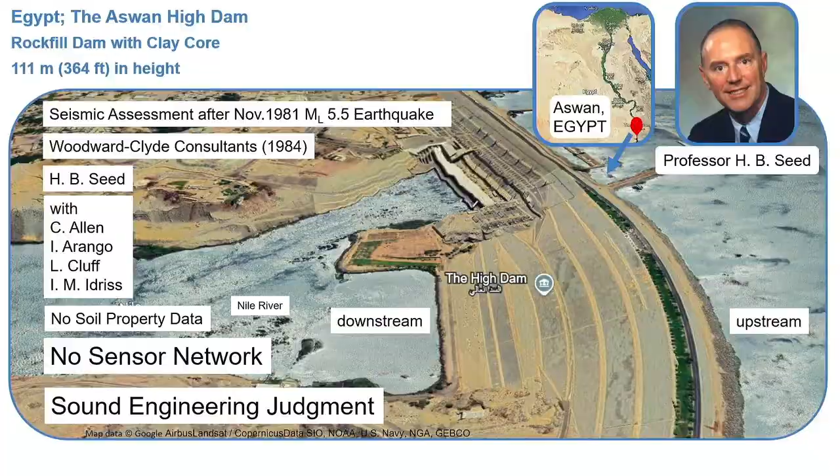A year after that, a large earthquake occurred in Mexico, as you might know, in 1985. A rockfill dam was also affected in this earthquake, but in this case, we had data from inclinometers, from surface reference points, and from strong motion instruments to measure accelerations, and also data recorded over 10 years from 6 different earthquakes.

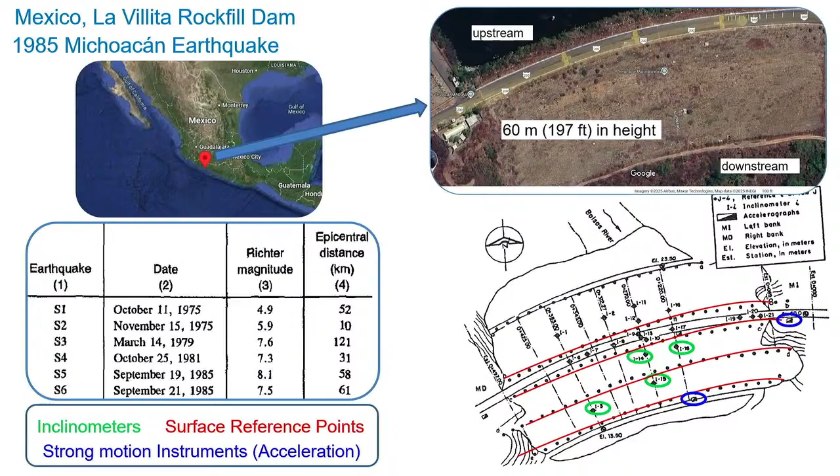This is a cross-section of the dam, where, as you might notice, this blue round thing is—I put it there as a symbol for an accelerometer or a strong motion instrument that was on the downstream slope of this dam. And along with the other instrumentation, it recorded accelerations from all the earthquakes that had occurred over the years.

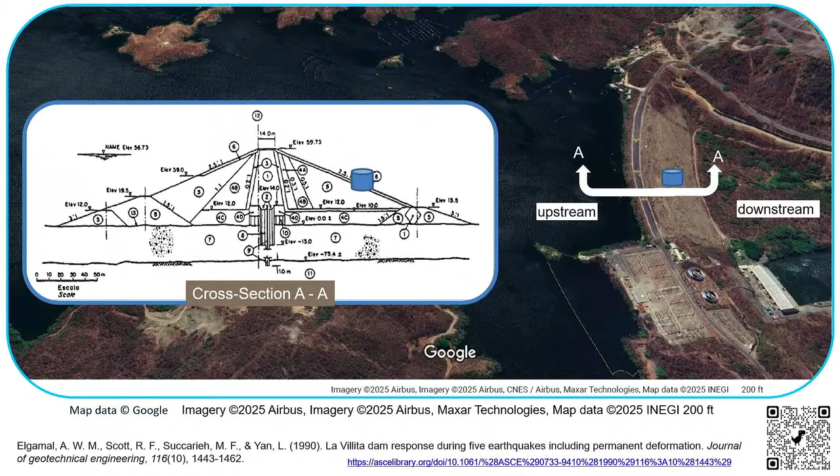And as you see here on the left side of this slide, all of these earthquake records, year in, year out, show asymmetric response with positive values much greater than negative values in the 75 events, the 79 events, the 81 event, and the 85 event. So when we started looking at this, of course, this was peculiar.

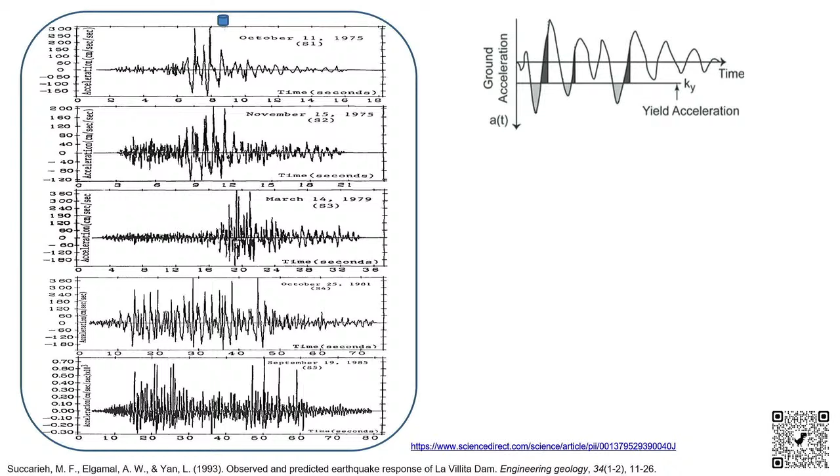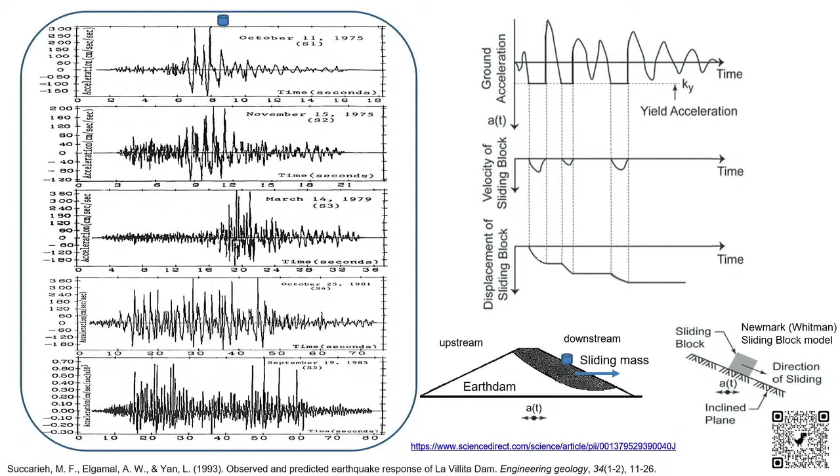And then we started thinking, well, maybe this is related to a yield acceleration that is causing these negative values not to be as high as the positive values. And if that would be the case, this yield acceleration would cause permanent displacements to take place. So we started going to the other sensors that we had to see if there is data recorded to show deformation, downslope deformation of this slope.

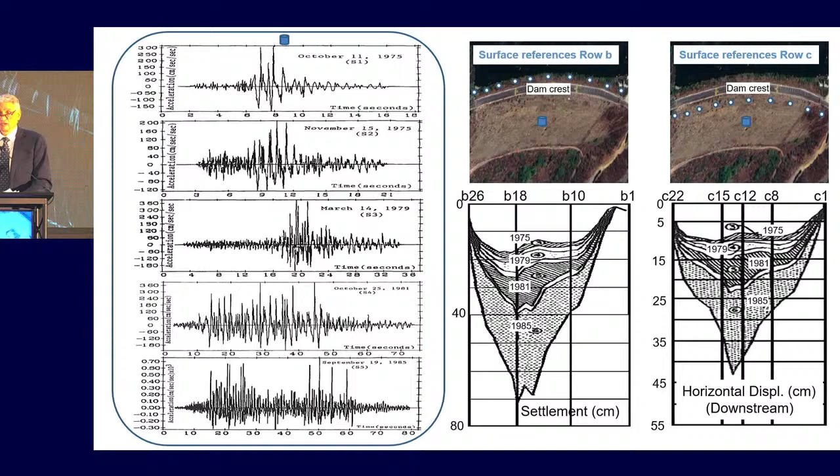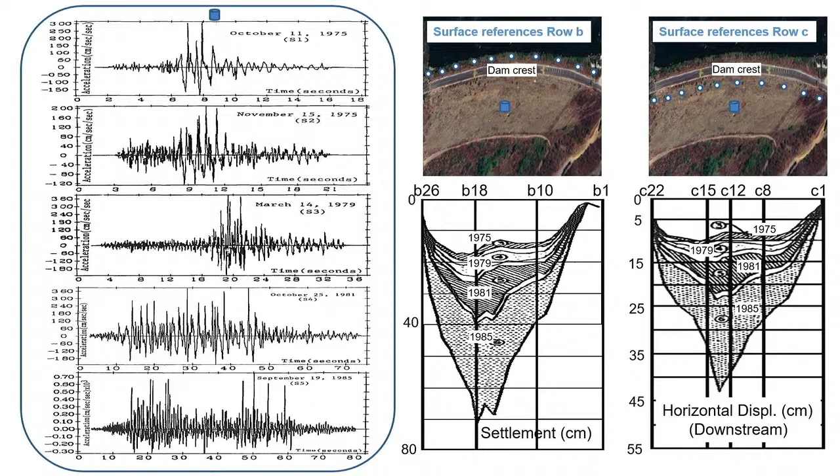And sure enough, from the surface reference rows that you see here, there was data showing in every event an accumulation of deformation, vertical settlement, and horizontal downslope deformation. In this 1985 event, the vertical settlement was of the order of 1 foot near the crest of the dam. So it really is a substantial amount just from one earthquake event.

In the early 90s, I was searching for industry matching funds for a National Science Foundation grant that I had received. And after lots of search, the nuclear industry, and in particular EPRI, came to the rescue. Not only did they provide some funds, but they actually provided data sets that really became a cornerstone of almost everything else that I did from there on.

These data sets were recorded from a large scale experiment that they had funded. Many countries were part of this undertaking. It provided data on the response of the structure, but also of the soil underground in the form of downhole arrays, which are accelerometers and pore pressure transducers installed within the ground.

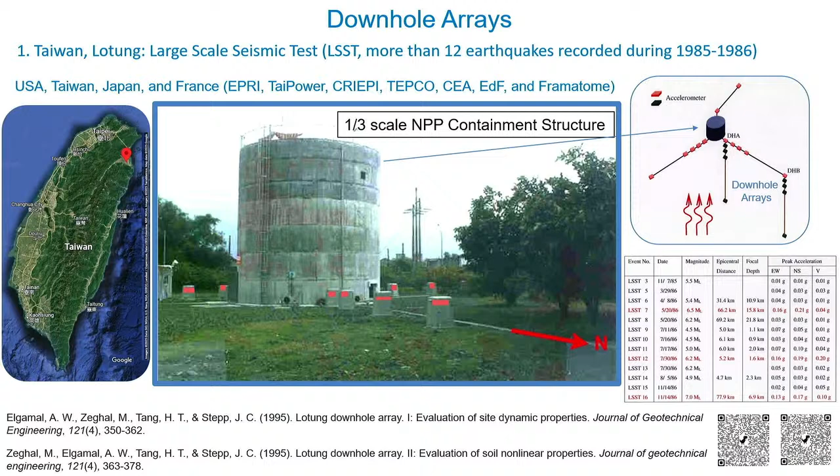I meant to mention that this logic of shear stress dependence on acceleration was employed much earlier by Seed and Idriss in their liquefaction simplified procedure, calculating the shear stress at depth multiplied by a stress reduction factor, on account of there being no downhole accelerations available. But this has really started with their good work.

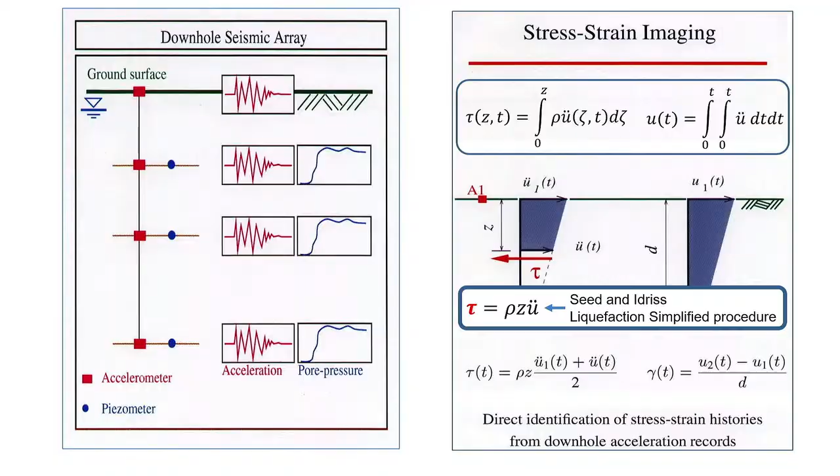So from the recorded accelerations at different depths, you see that we can back-figure stress versus strain for the entire time history of the earthquake event in the east-west and north-south directions. And then we can select loops of different sizes, different strain levels, to see the change in stiffness and the change in damping as a function of shear strain amplitude.

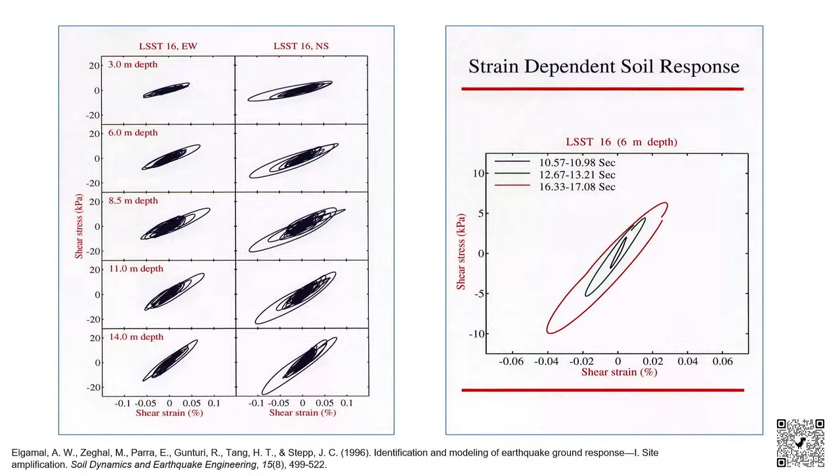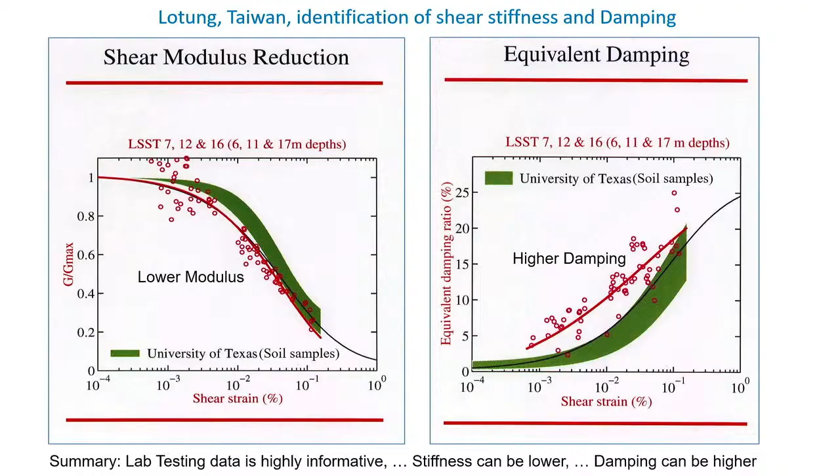You see that shear modulus is a bit lower. Damping is actually noticeably higher. But it's still validated that laboratory testing is very useful and sheds additional light on things that we would just not know. If we only had the data from the lab, we would just use the data from the lab. We don't know that, for example, what actually happened was showing more damping and so forth.

EPRI also had an additional site in Taiwan where they had instrumented, also with downhole instrumentation, a very stiff site. So Lotung was a soft soil site, and Hualien was a very stiff soil site.

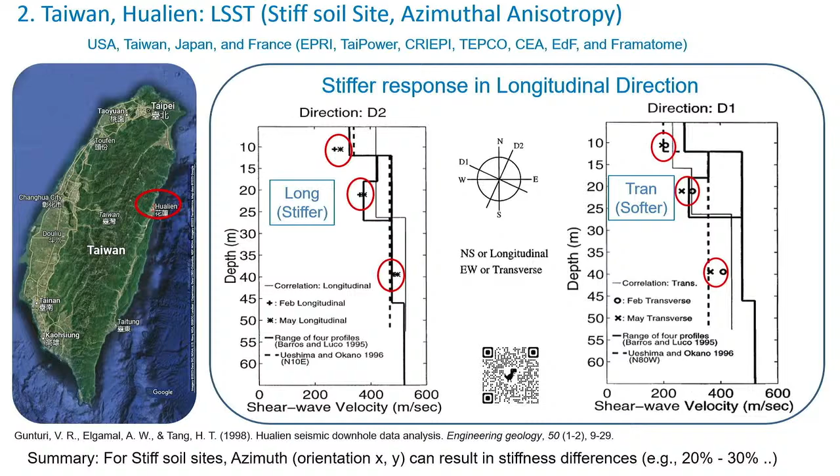When we started doing our analysis with the data, trying to back-calculate shear wave velocity profiles, we kept finding that the X and Y direction shear wave velocity profiles are not the same. One of them is noticeably stiffer than the other. And when you get something you don't expect, you keep going back and forth checking your code and your analysis method.

And then finally, we found a publication by Professor Luco where he did all his analysis on the response of the superstructure, on the response of that nuclear containment structure, the one-third scale nuclear containment structure, and independently, without any of the data recorded in the soil, came to the conclusion that the only way to explain the recorded response was that there must be an azimuthal anisotropy, in that the soil in one direction is stiffer than the soil in another direction.

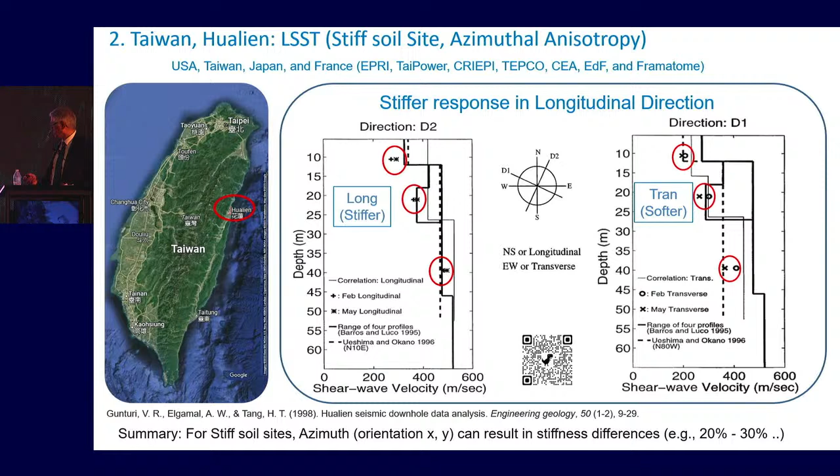So even though earthquakes don't happen every day and it is costly to do site instrumentation, you can see things that you will never guess might be happening from actual data, as opposed to just reliance on laboratory tests or physical modeling, or of course, computational modeling. So hopefully, more and more of these data sets will become available for people to learn from and benefit from.

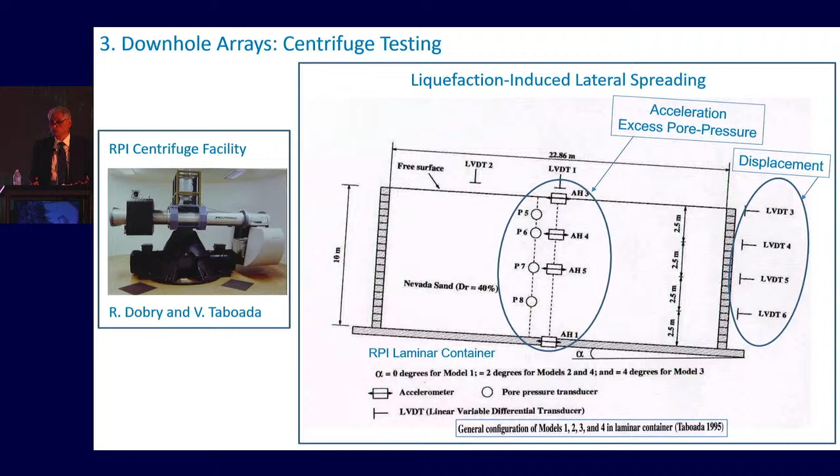Once we started working in this direction of stress versus strain, we started seeing that we can apply this to physical models. People are doing lots and lots of centrifuge tests. They are doing lots and lots of shake table tests. And they put downhole arrays, essentially, in their experiments.

And actually, for situations where they are tracking lateral deformations, on the right side here, you see that they also put displacement transducers. So not only do we get accelerations and excess pore pressures, but we also get displacements, which allows us to synthesize the whole lateral deformation, stress-strain history at different depths between accelerometers, and get the whole picture from the very top to the very bottom, of how the shear strains were evolving at different depths.

You might see, for example, that near ground surface, the accumulated strains are low because, of course, there was liquefaction at depth, which isolated the layers near the ground surface.

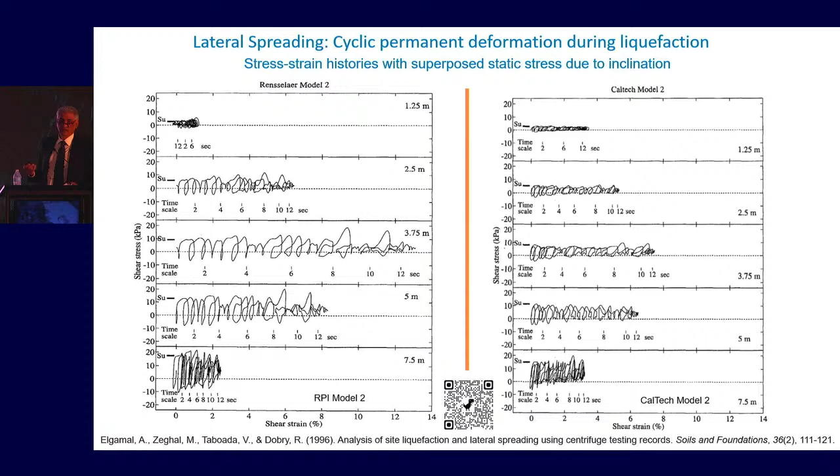Environments like this, of course, were really amazingly useful for calibration of computational models. Without this kind of data, you're only relying on sample tests for large strain deformation. And the information that you get here about the response of a whole site is just invaluable. And of course, from there on, I would say hundreds of experiments have been analyzed, partially, by this technique of stress versus strain.

This is another example from a test at UC Davis, where we were looking at the response of saturated, very dense sand. And saturated is a very important word here, because this sand is highly dilative, and with the saturation, a suction kind of effect happens, and we get this banana-type loops at very large strains.

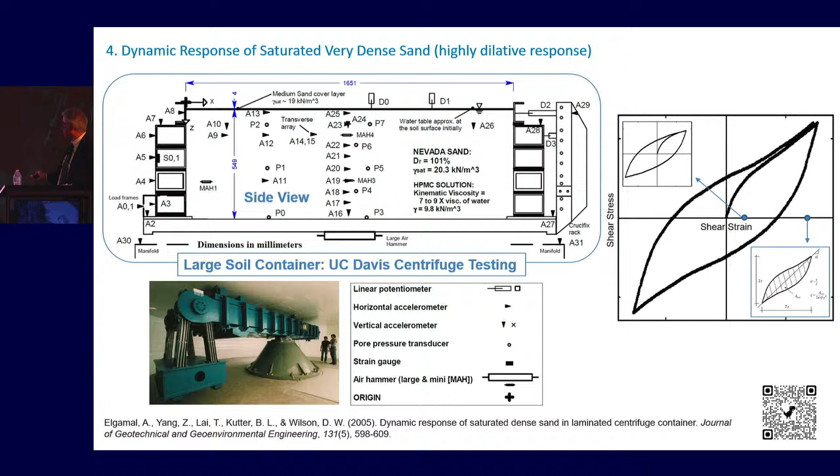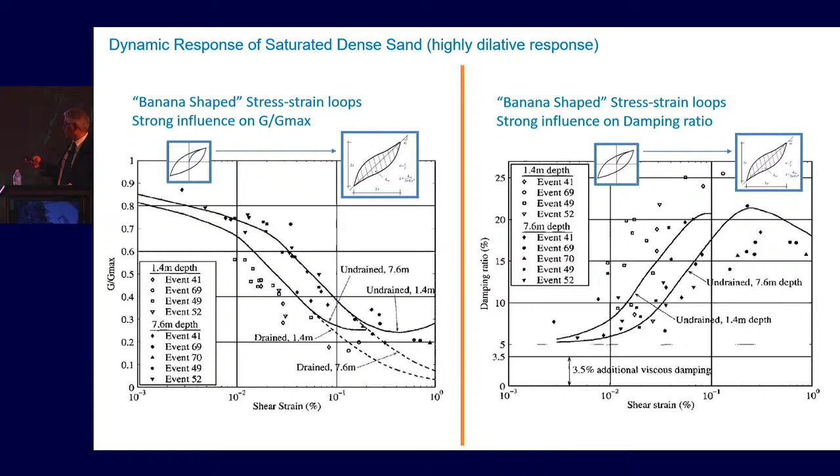So at small strains, you see that the loop has the shape we expected, stress versus strain, but at large strains, it starts taking this different shape. And because of that, if you do the G over G-max curves back-figured from the recorded accelerations, you see these shapes where instead of the usual reduction in shear modulus with shear strain, it actually levels off, because the loop starts getting stiffer. And the damping at the same time levels off, and in fact starts decreasing, because the loop is getting thinner and thinner as the strain size increases.

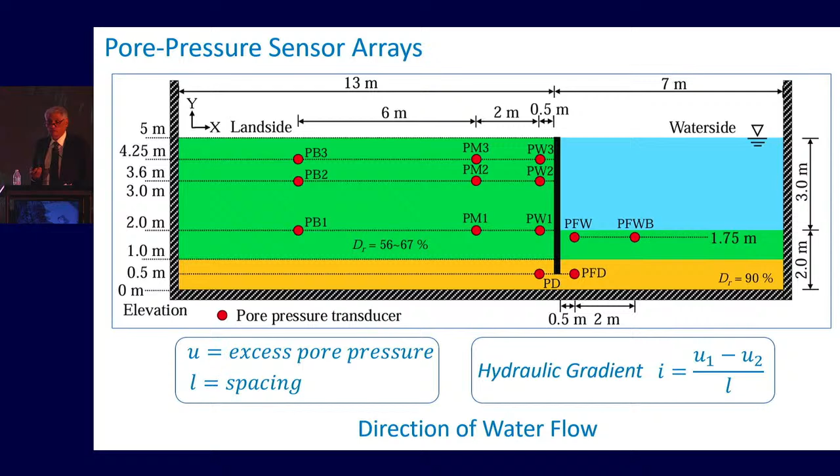So I wanted also to bring up something related to pore pressure sensors. Of course, pore pressure sensors tell us the excess pore pressure buildup in an experiment, but also from these sensors, if we subtract one value from the other, we can estimate a hydraulic gradient, which can tell us the direction of water flow. And this particular experiment was selected because, as you see here, there is a potential for water to flow from one side to the other.

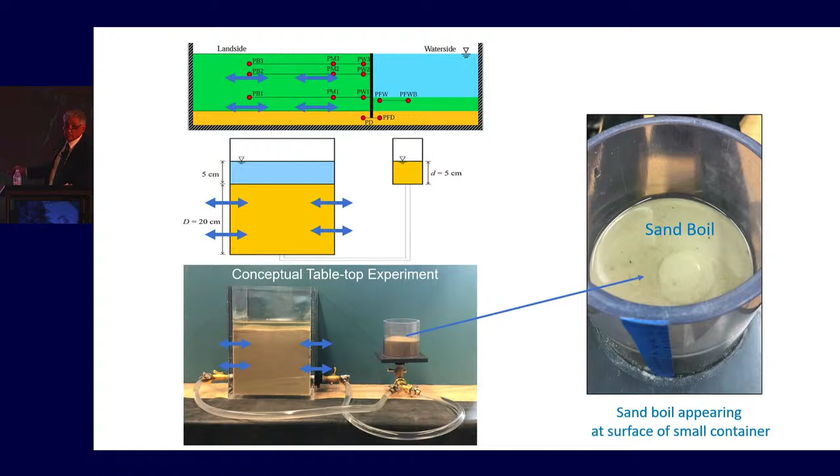And for that matter, in this schematic, if you shake the one side only, you get artesian flow, and it can increase the pore pressures on the other side and lead to a sand boil appearing on the other side, as you see here in this conceptual experiment.

So the LEAP project, as you know, has really been an excellent project for the centrifuge community, and it's still ongoing, hopefully.

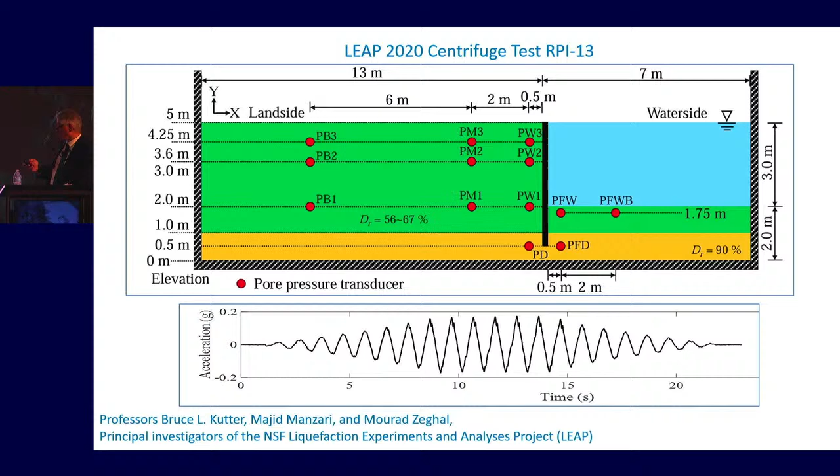Where they have done experiments of that type with a sheet pile on one side, so it was a very good opportunity to look at this mechanism.

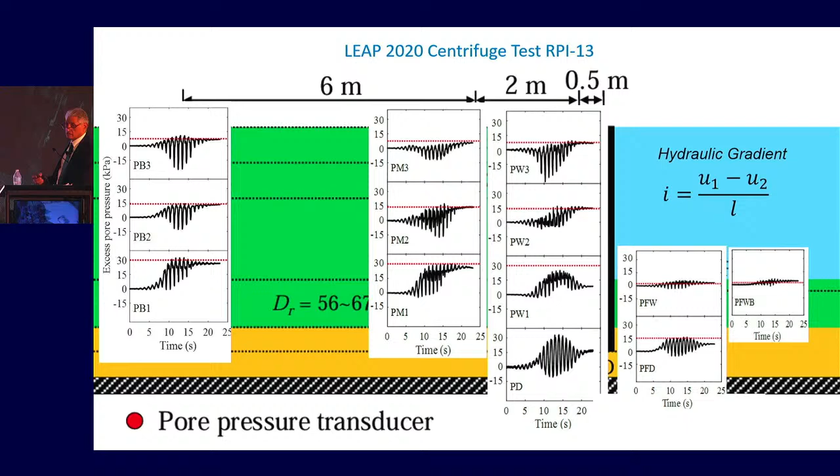We're zooming here on the excess pore pressure sensors, and this is data recorded in this RPI experiment number 13, excess pore pressure data at all the locations where there was a pore pressure sensor, the red dots. So if we apply this simple logic - simple, not very accurate, but informative - to calculate a hydraulic gradient based on the difference in excess pore pressures divided by the spacing.

But near the sheet pile, there is some water trying to move towards the sheet pile as the sheet pile is moving away and yielding. But the most important thing is water is flowing from the left to the right, finding that it's easier for it to escape this way, and consequently it contributes to the excess pore pressures on the right side, even if the soil there wasn't planning to liquefy. It was very dense and wasn't planning to liquefy. All of a sudden, it gets this flow from the left side that is causing increases in pore pressure.

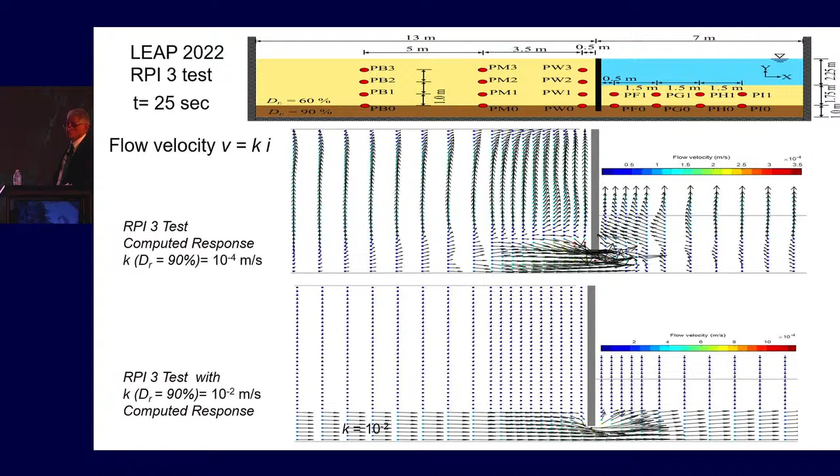This is a computer simulation just to further elucidate the mechanism. As you see here, the same thing is happening, the water going to the other side. But also here, this is a case where we increased permeability of that lower layer by 100 times, like a gravel or something. You see now the arrows for velocity are so large - the water is finding it much easier to escape on the other side than to travel all the way up here to escape. Certainly that would lend itself to higher excess pore pressures on the right side.

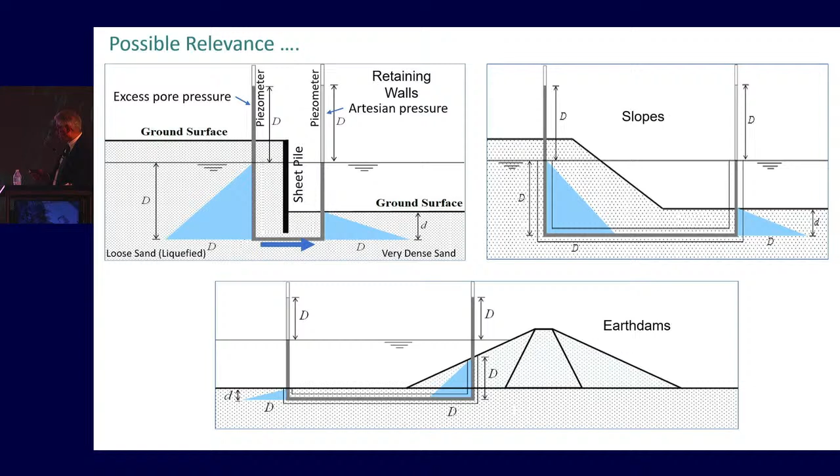So possible relevance might be for situations with uneven topography, like sheet pile walls, slopes, dams, as you see here, and maybe some other scenarios. It's an interesting topic to look at further, in our opinion.

Okay, let's do something about sensors that are just based on vision, that just are based on looking at something and seeing what is going on.

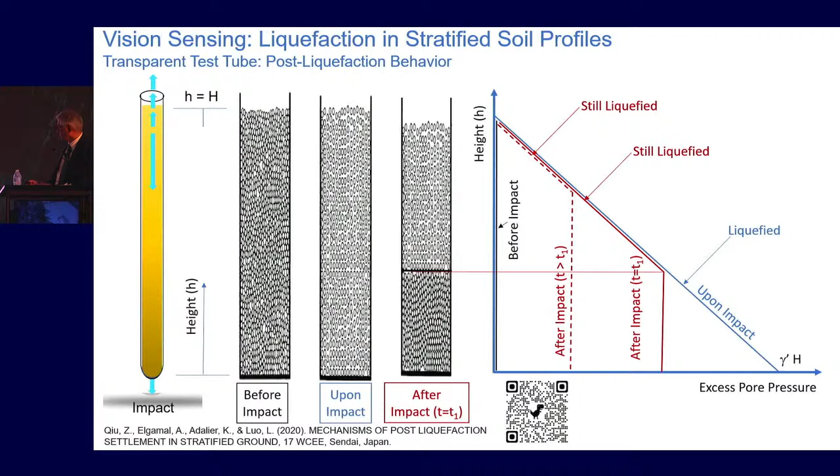Of course, there is always a lot of interest in stratified sites, sites where permeabilities are not the same or other soil properties are not the same. So I picked these videos to show you quickly a scenario where this tube was transparent, of course, 1.3 meters in height, and it had a sand of higher permeability compared with a silica powder, where the sand permeability is approximately 60 times more than the silica powder.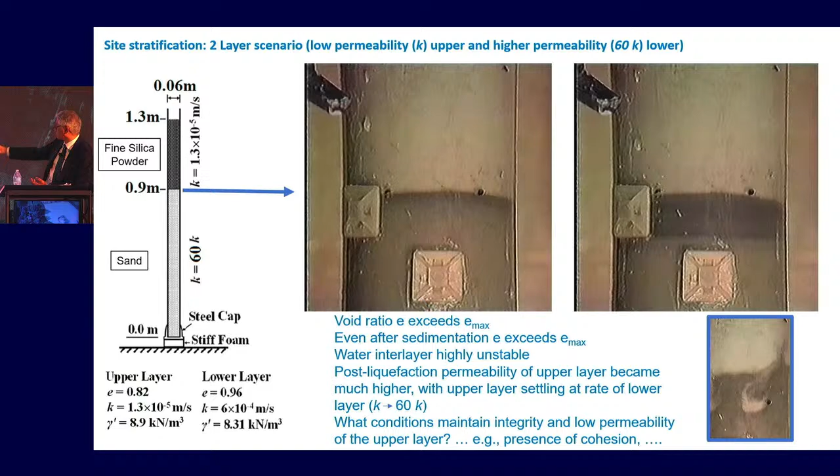Then we drop the tube and start monitoring what is happening at the interface between these two types of soil. Of course, the idea is that this material settles very slowly because it has low permeability, while this material settles very fast. So we're looking at this location, which is the interface between them - this is the silica powder, this is the sand.

Here we go. If we look at the video on the left, you will see that a water lens is opening up. The sand is settling fast, the silica powder has very low permeability, and it opens this water lens - water is trapped - and then several seconds later, the water lens has become this big, and then with just very, very mild disturbance, you will see what is going to happen now on the right.

The upper material starts collapsing into the water lens. If there is any shaking from an earthquake, it would have collapsed, as you see here. And essentially, a sand boil is coming to life from the video, as you see here.

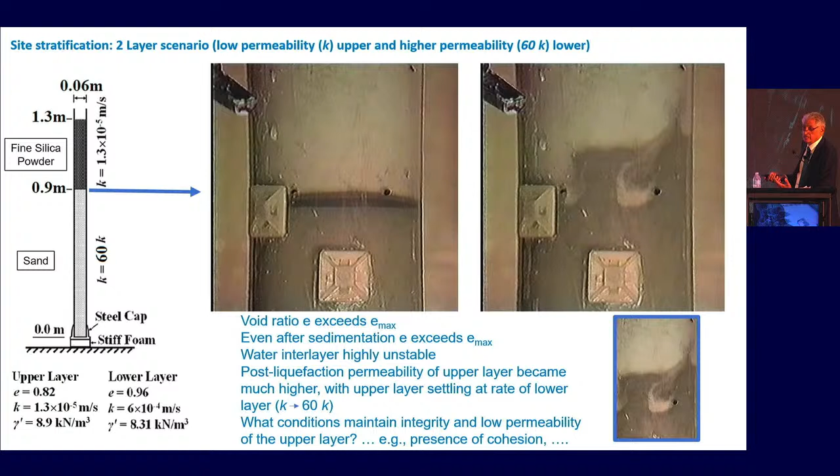Some of the interesting things we can see from this test is that while this process is happening, the void ratio actually exceeds Emax according to ASTM. This is just material that is floating and falling into this open space. Even after sedimentation, the actual e is probably still higher than Emax, the way ASTM says we should determine Emax.

The water interlayer in this case, even though it has low permeability, is highly unstable, and the post-liquefaction permeability became much higher. So if someone is doing a computer simulation of this upon liquefaction or post-liquefaction, they probably want to use a much higher permeability than the actual permeability of the layer.

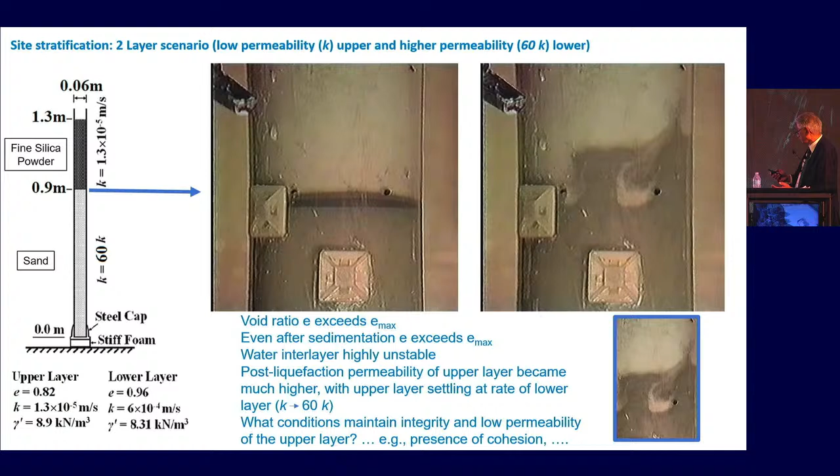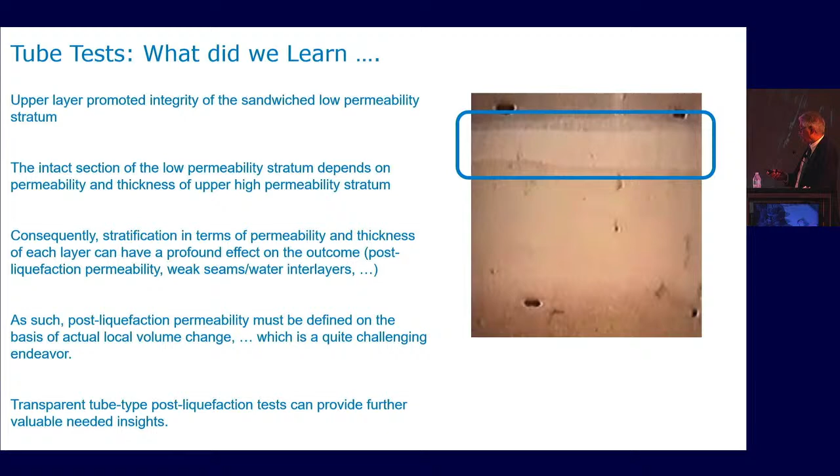So a 3-layer system like this gives you something very different from the 2-layer system, with consequences for potential lateral deformations, and for what the actual permeability is. These are all things that depend on the thicknesses of the layers, permeabilities of the layers, and locations of the layers within the soil profile.

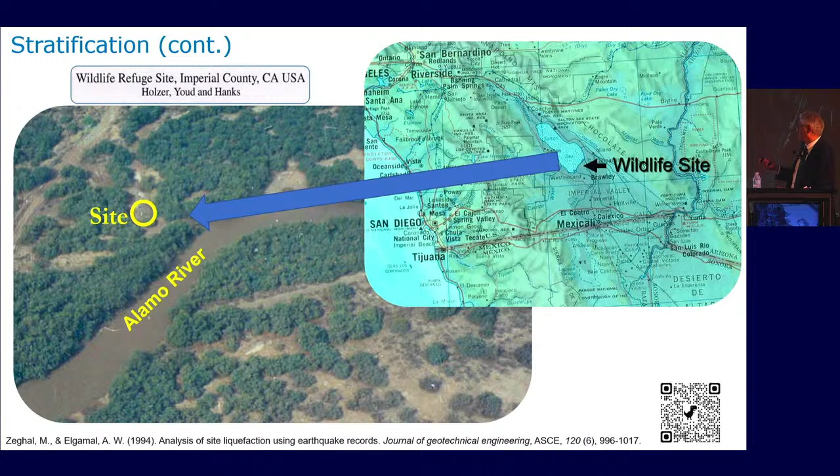So I couldn't resist this temptation related to stratification to go back and visit the wildlife site, which we had visited long ago, looking at stress versus strain also from a downhole array at this location. As you see here, there were 2 instruments, 7.5 meters apart - 2 strong motion accelerometers, 7.5 meters apart - and 4 excess pore pressure sensors.

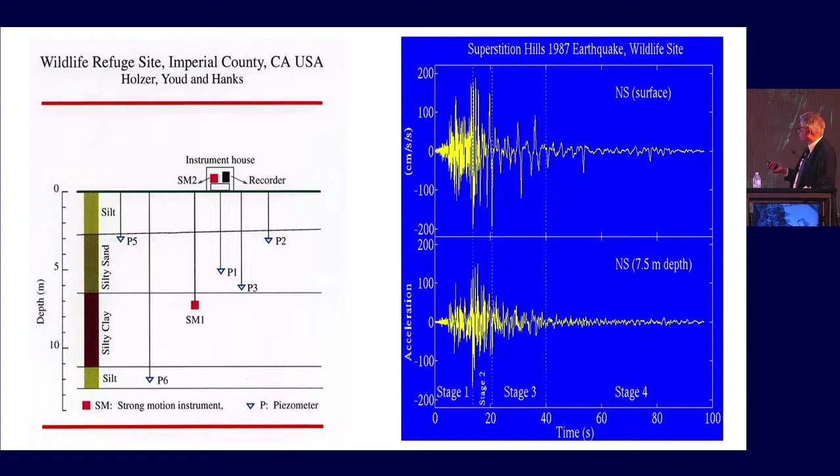Some of you might already be aware of this, but as you see here, the accelerations at ground surface showed these peculiar spikes that also coincided with drops in excess pore pressure in some of the recorded pore pressure sensors.

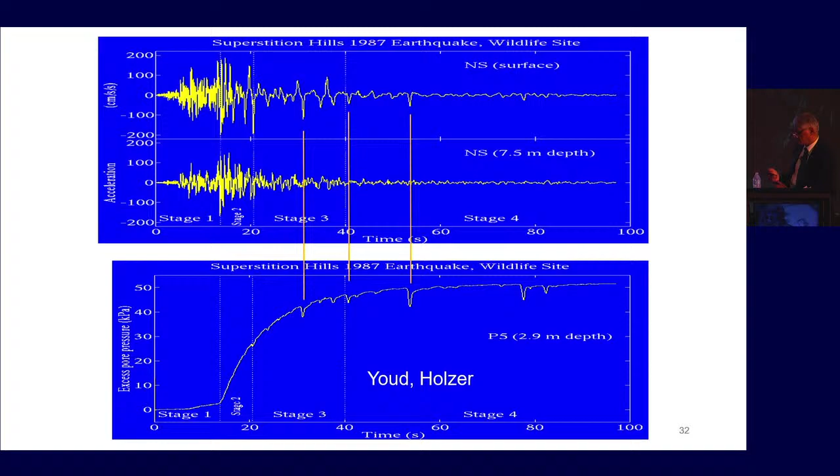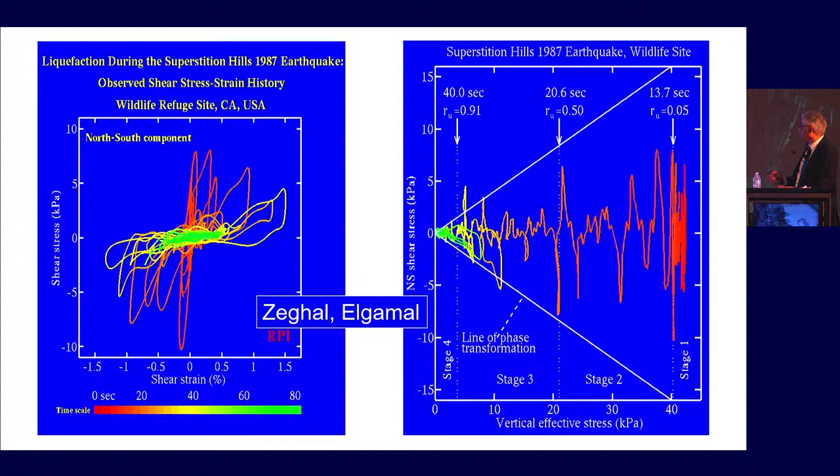So if we look more carefully at the data from these excess pore pressure sensors, you find that the upper two, beneath that silt layer of lower permeability, show the spikes. In fact, the one closest to that interface shows the most spikes.

The one that is a little deeper, only half a meter deeper than this one, you could just start seeing traces of the spikes, but they're still there. But if you go to the excess pore pressure sensors at depths of 5 and 6 meters, you don't see any evidence of any spike in them.

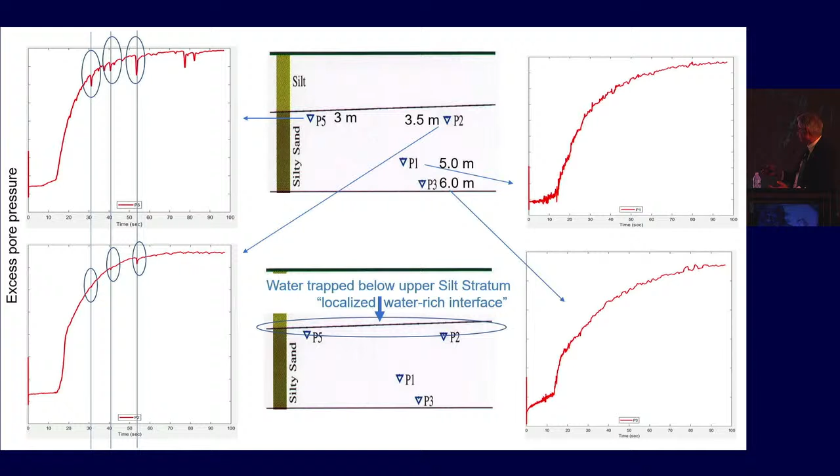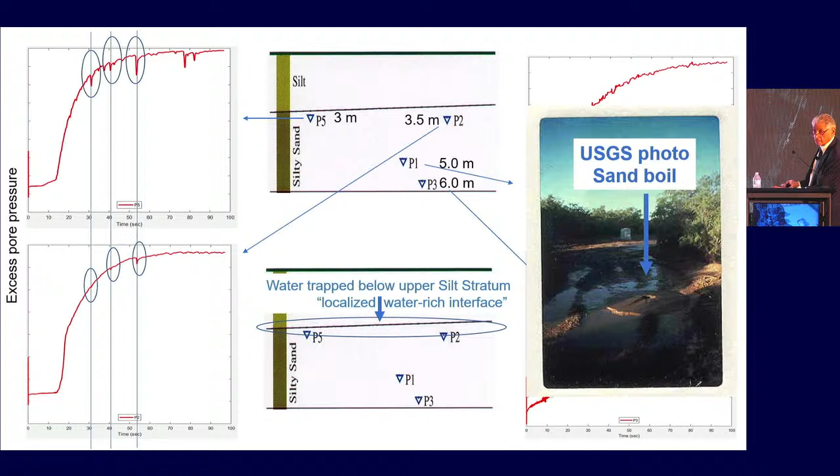So it suggests that the large deformations really were concentrated to a great extent in that zone, because by the time we reach those deeper sensors, there was hardly any dilation happening. The deformations really were taking place in that upper half meter, where there is a water-rich layer or lens of water that was evolving. In fact, there is evidence that there were sand boils at the site, which is also something related to stratification.

And consequently, that 1.5% is very likely much higher, since now the deformations are concentrated right below the silt layer, at the very top of the liquefied layer, and might be as high as 10 or 11% if you divide by a spacing of 0.5 meters or 1 meter instead of the 7.5 meters depth.

Okay, very quickly, I wanted to touch on a situation of sensor networks for soil structure interaction. Of course, this could be a presentation of its own.

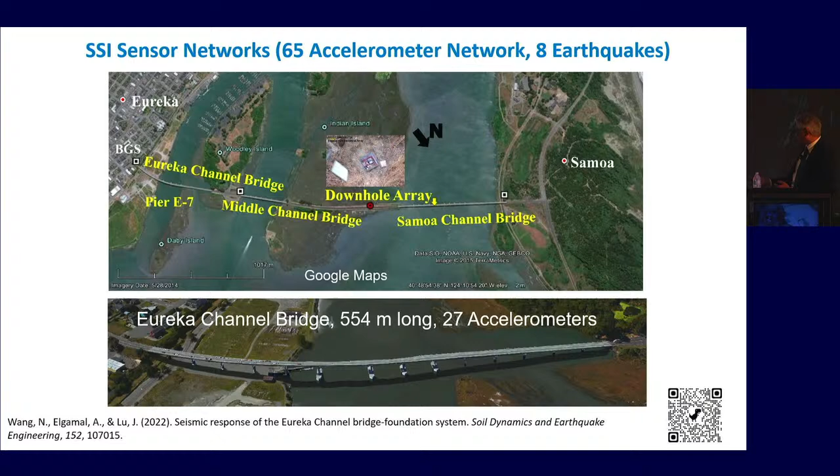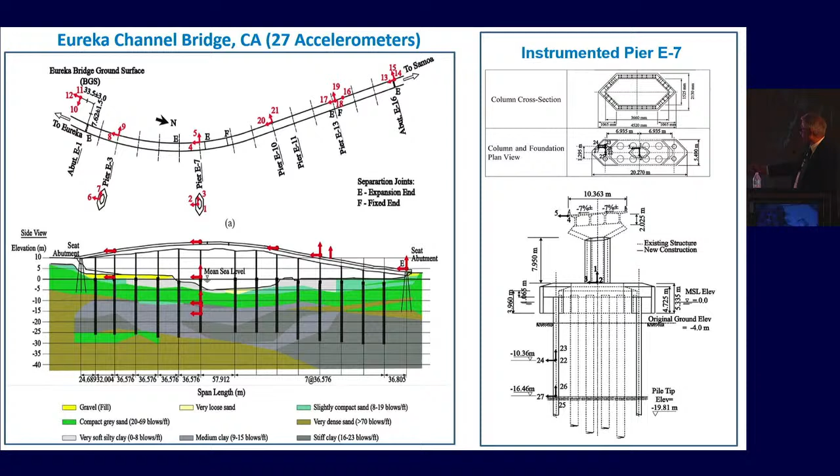There was this scenario at Eureka, California, where there was instrumentation deployed on several bridges, and the downhole array also at that location. The bridges, as you see, are half a kilometer long, 3/4 of a kilometer long, and the instrumentation is all around at the top of the structure, also in the soil and the downhole. Also, when they were doing a retrofit, they installed accelerometers inside some of the piles in the ground. So it was really a great opportunity also to see what the pile foundations underground were doing. This is here the pier that was instrumented, E7, and the instrumentation underground.

From the analysis, there were only mostly weak earthquakes and one moderate level of shaking earthquake. So from a study of optimization to get the best possible response from the data available to us in the ground, we back-calculated lateral stiffness of these pile foundations. This is the plan view of each set of pile foundations under each pier. We found that in the small earthquakes, lateral stiffness, for example in this zone where the piles are nearly totally embedded in the ground, is about 500 meganewton per meter.

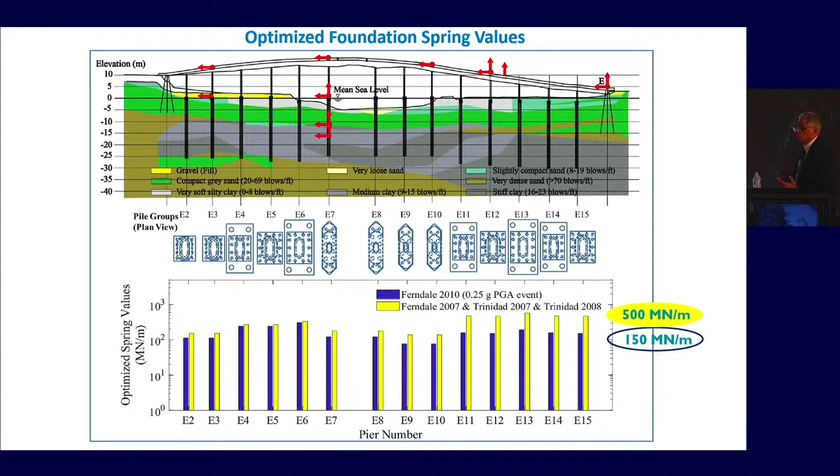And then when we went to the one single moderate shaking event that had a peak acceleration of 0.25 G, this stiffness dropped by more than 3 times, as you see here. So even for a relatively weak event, you see that the stiffness drops by a very substantial amount.

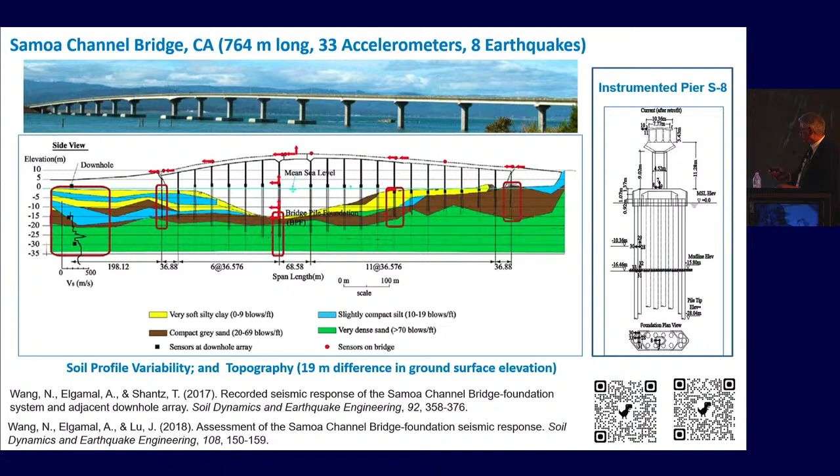Another bridge there, the Samoa Bridge, again showed the same thing—since time is tight, but you see again in the event that was the moderate event, lateral stiffness of the systems that are embedded in the ground was 500 versus 120, almost a factor of 4 or more.

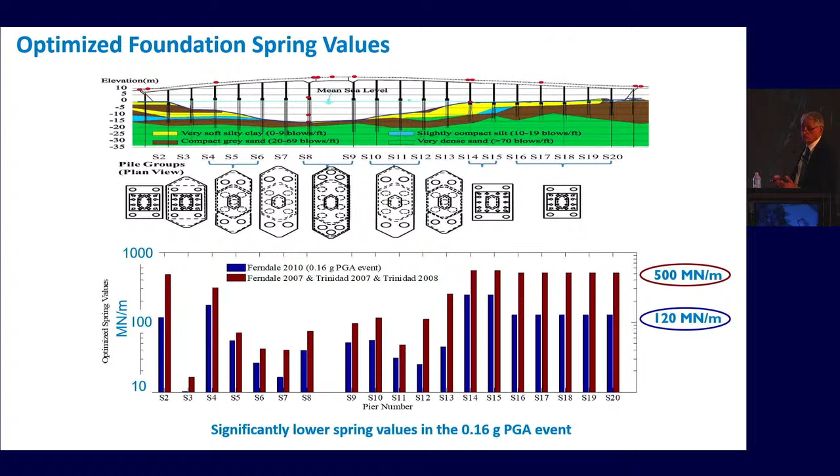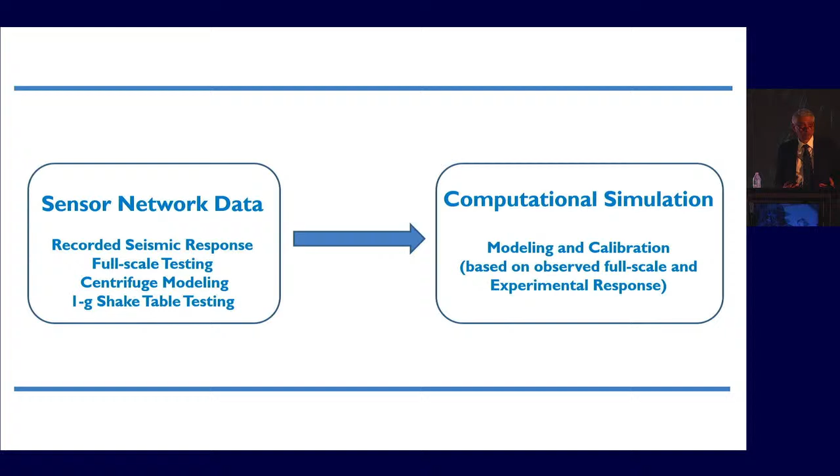So with all this data, ground response alone, soil structure interaction, of course we are looking to have simulation tools that can be calibrated on this basis, and then from there we can use these tools for prediction of response under other earthquake scenarios. So side by side we were working on that, developing models, incremental plasticity models for cyclic loading, some for granular soils, and we adopted the UP formulation of Chan so that we can look at liquefaction, flow liquefaction, cyclic mobility, lateral spreading. Each one of them required special handling, so to speak, so that we can get the response we were observing.

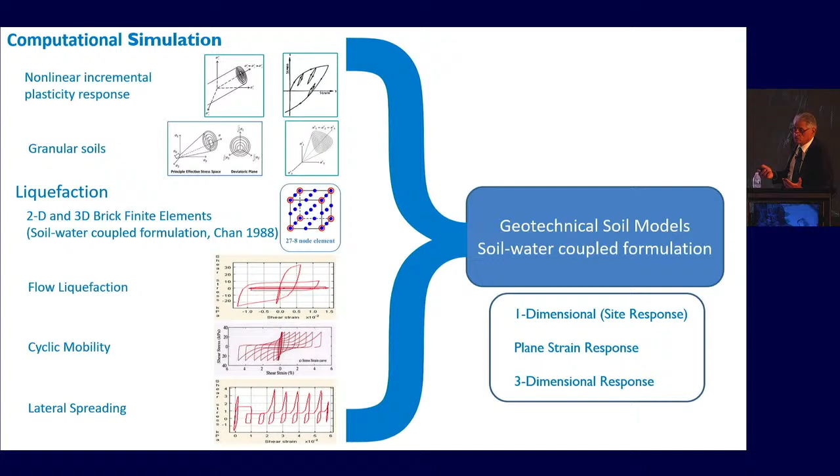But with all these things that also work in 2D and 3D, a great opportunity came to integrate all these models into the PEER OpenSees framework—that was really a great opportunity for us. It brought into the picture very useful nonlinear elements also for the structure, very powerful computational tools to do the analysis. And it is something that, as you all know, is widely employed worldwide. We were very happy to be among the early contributors to this package.

And of course, since that time, many great pieces of work have been done by others and are being integrated into this platform. When we started thinking, we have these three-dimensional tools, we want to do something in 3D—life is 3D. Bridges are a 3D structure, shaking X, Y, and Z, and so forth. So we started looking at simple 3D scenarios.

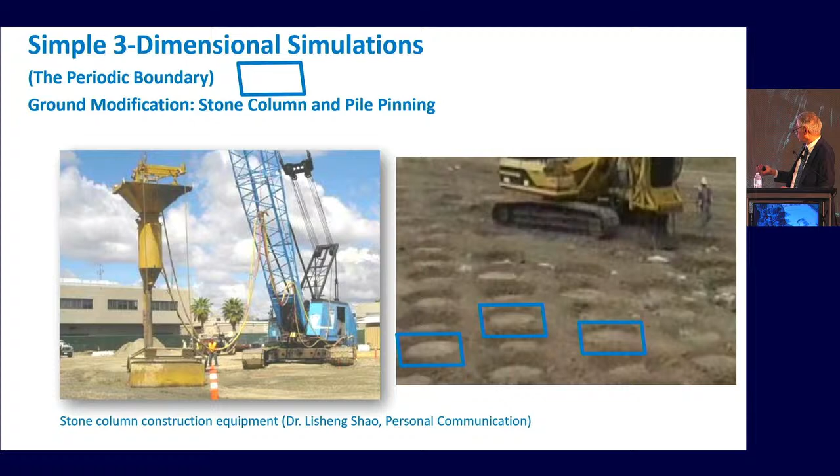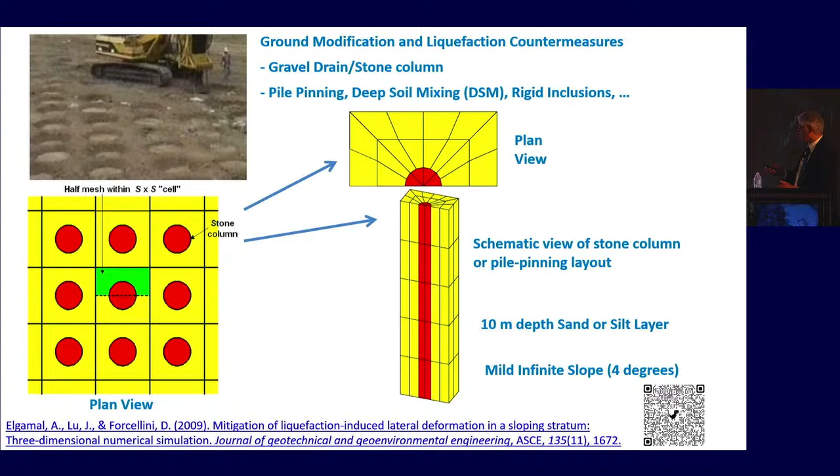One of them was this scenario where ground modification is done in the form of cells, as you see here. So if we use the periodic boundary logic, we can do three-dimensional analysis of ground modification: gravel drains, stone columns, pile pinning, deep soil mixing, and many others. Very simple mesh, runs very fast, almost as fast as running a one-dimensional analysis, but you're doing things in 3 dimensions in a very convenient way.

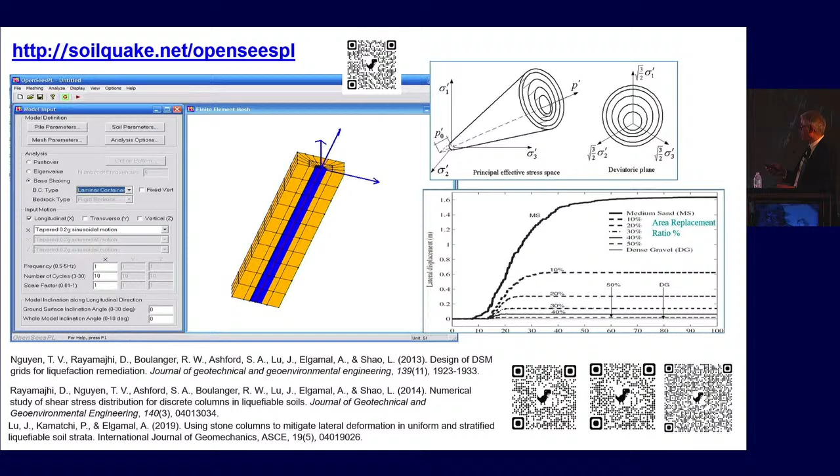We even put together a user interface to do the pre- and post-processing and get the results for, like I said, a myriad of ground modification methods. After that, of course, we are looking for simple environments for 3-dimensional analysis.

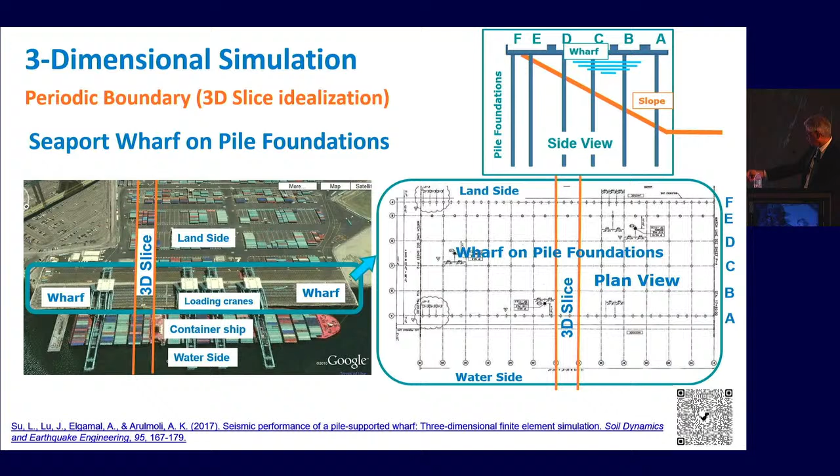Another one that surfaced was the situation of a wharf. As you see, the wharf extends this way, but in plan view, it is supported on piles in a pattern that repeats itself, which allows us to take a slice and study the wharf problem on pile foundations in that form, with a 6-meter wide 3-dimensional slice between the pile foundations.

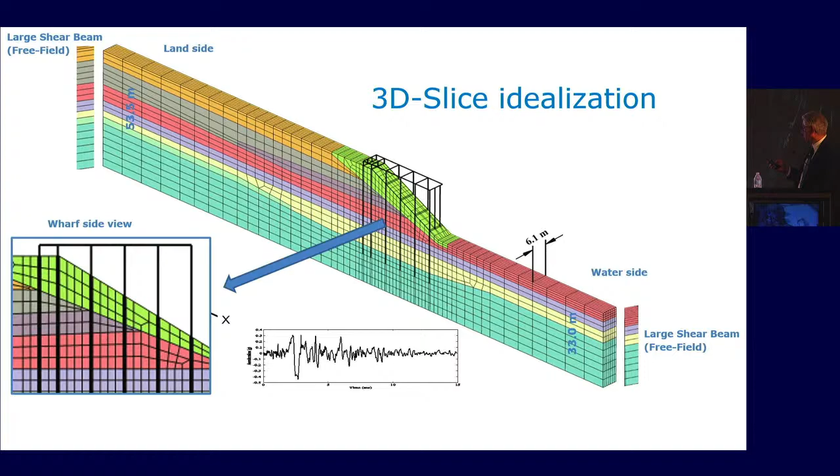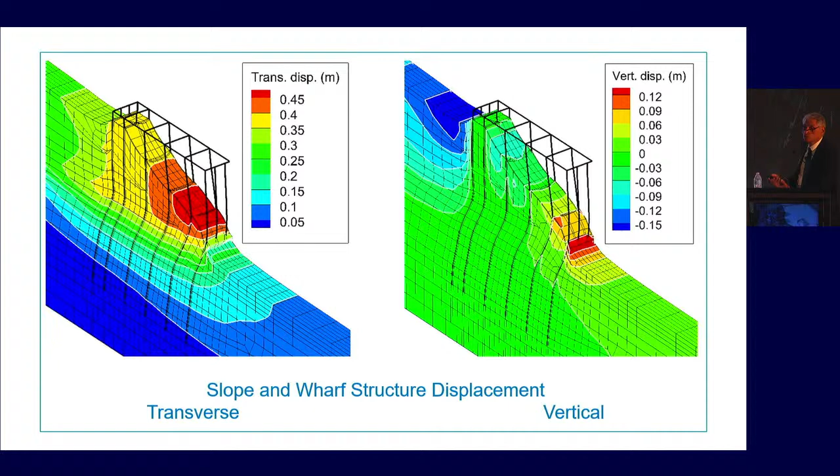And in return, you see very large changes in axial forces happening in the piles. These are just representative, but hopefully make us think more about what axial forces might happen when there is lateral ground deformation or slope deformation for wharfs and pile groups, because the pile groups are spatially distributed, and you can have positive and negative forces acting on them. This is probably contributing to the damage we've been observing, but typically most people would still attribute the damage to horizontal deformation more so than vertical.

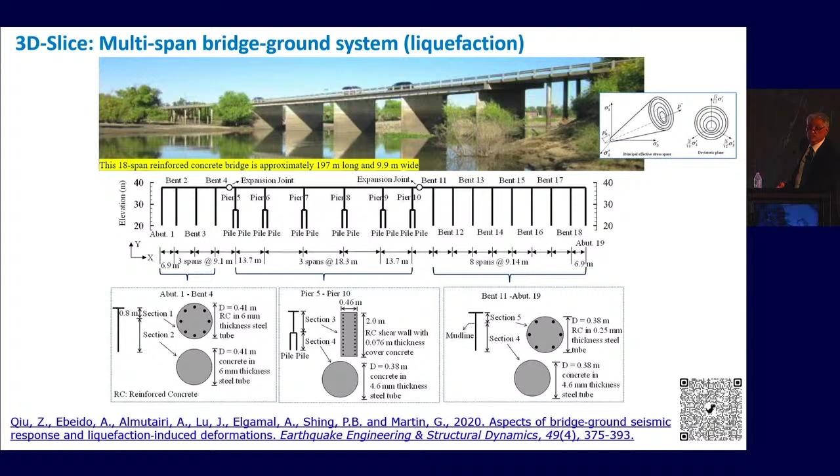The slice logic also helped us look at bridge systems this way, and bridge-ground systems. Again, we took a slice here in this 200-meter long bridge to look at mechanisms of response that stem from overall system response, from modeling the whole bridge as accurately as you can from the structural point of view, connecting the soil to the bridge elements by these zero-length elements that allow us to do axial force interaction and horizontal force interaction.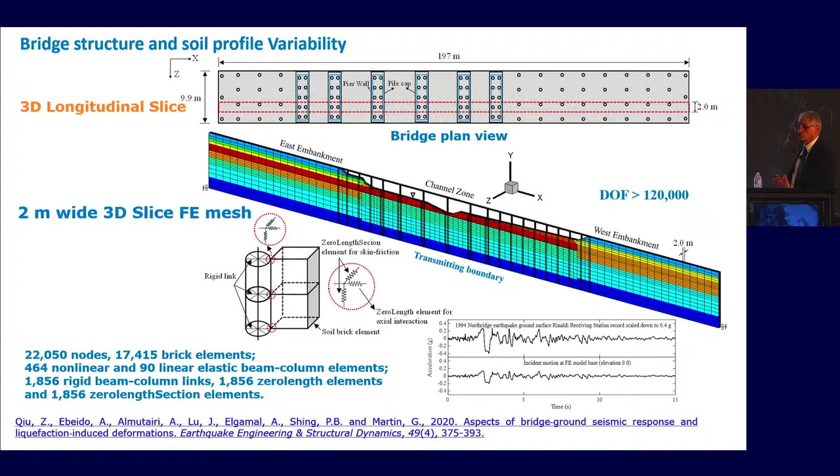After the shaking, for example, in this case, first of all, you notice that there is a permanent ground deformation affecting the whole domain, not only deformation from slope deformation on the left and right, but there is a lurch in one direction just because of the nature of the motion used as excitation at the base of the mesh. That actually contributed in the end to the deck moving forward about 20 centimeters at the top.

Whereas when that slope moved backwards, or in the other direction, you get a double curvature here on the piles on this side. Of course, you get lateral spreading forces on the piles on the left side, but also interestingly, somewhere in the middle, there is very little soil movement right and left, but because the deck has moved 20 centimeters, that also caused trouble for the piers in the middle. The piers in the middle are not suffering because the piles have moved, but because the piles have not moved while the bridge itself has moved, due to that lurch and the mechanism of response associated with it.

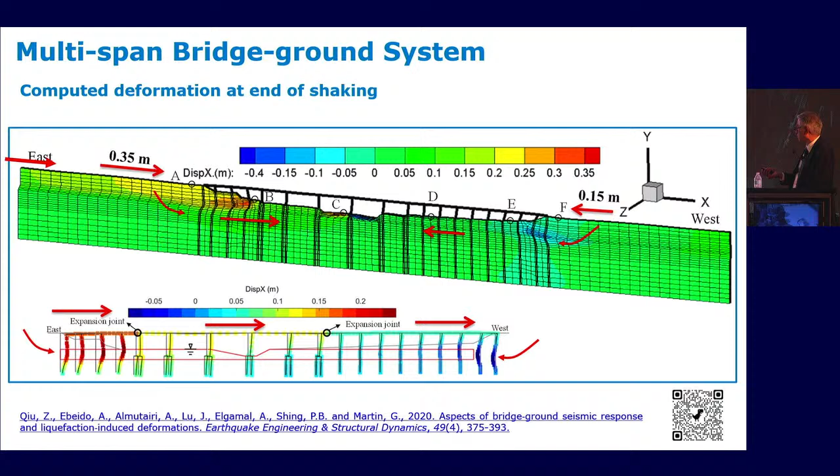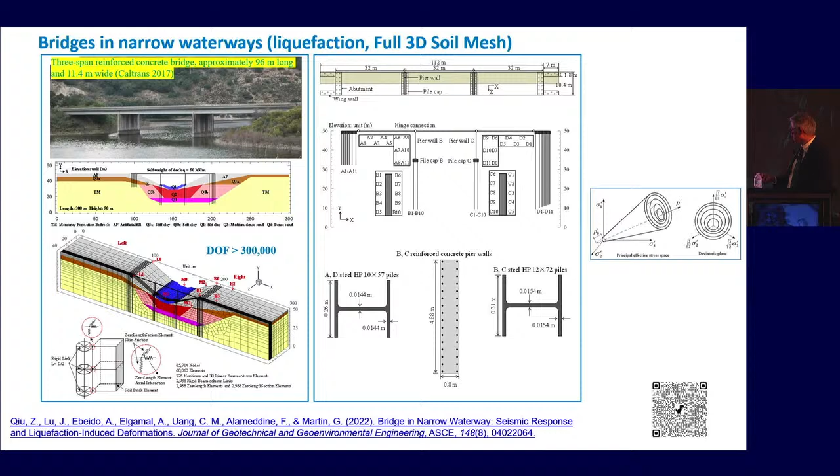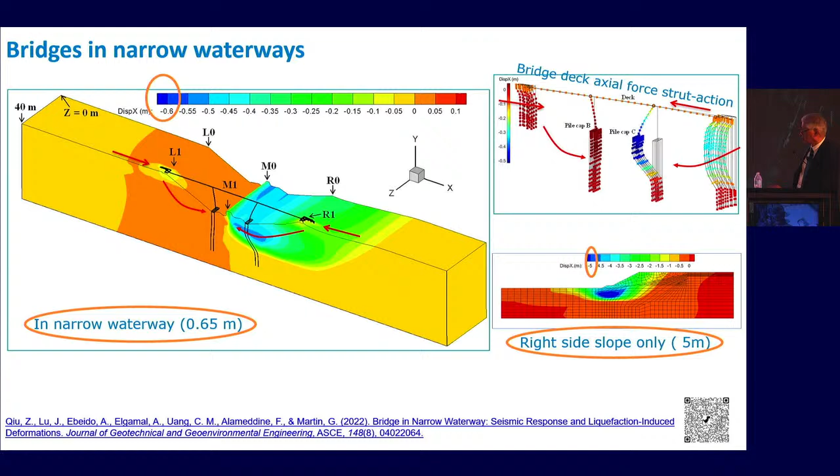A similar situation arose when we looked at a 100-meter long bridge in a narrow waterway, supported on steel piles. You see here that the deformation of the left and right slopes interact in the middle, and they actually get in each other's way. The final deformation, which was 0.65 meters maximum, if studied as one slope at a time, would have resulted in a 5-meter lateral deformation estimate. That was a nice, insightful thing to see, and it really ought to be part of analysis of systems where the waterway is narrow enough that it inhibits deformations on that account.

This is just a quick slide because I mentioned that we integrated everything with many peer researchers, and consequently, the tools are being used today also to calculate repair cost, repair time, and carbon footprint, as you see in this schematic.

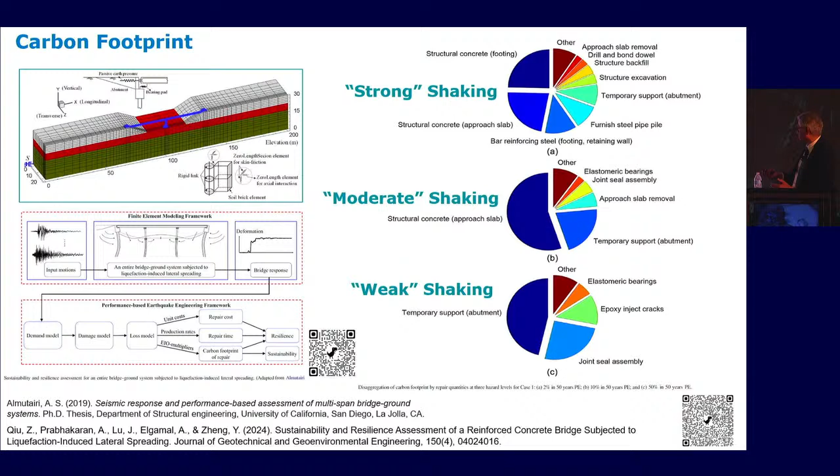So quickly, let's see what we learned. We are seeing that we can do much better three-dimensional simulation of simple scenarios, like the slice model and the ground modification model. We are seeing that axial deformations need to receive more attention for pile systems, not only lateral deformations and bending moments. This method of interaction between the soil elements and the pile element has worked okay for us, but still needs a lot of additional work to look at scenarios of gapping, liquefaction interaction, and very high strains that the soil suffers as it interacts with the pile, and so forth.

Down here is the idea of equivalent linear analysis, which used to be the generation before plasticity and so forth, and it actually can still be done in the time domain. It's done in a different way, not exactly like the old one, but can still be very effective in one-dimensional as well as two- and three-dimensional analyses. And I wouldn't give up on it.

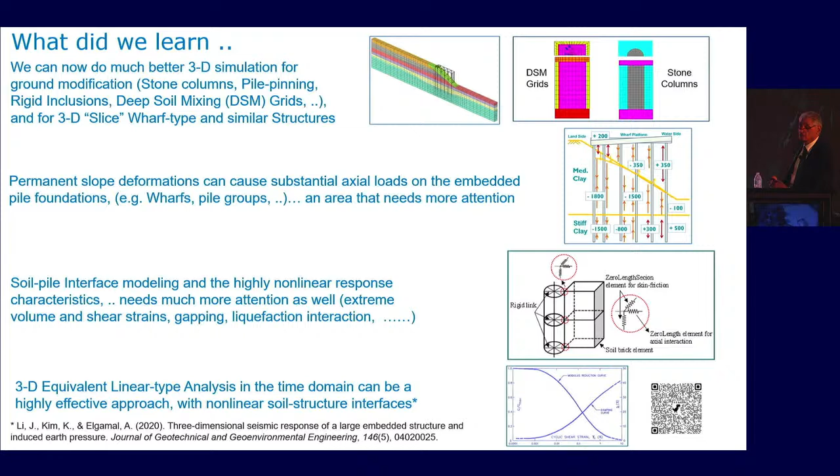Being in the business of plasticity for all these years, when I saw that something simpler can give us a good answer for situations that are not liquefaction, of course, but it can be useful, so I thought I'd bring it up. And then the other thing to keep in mind is the system response and the interaction of the slopes whereby the bridge experiences axial forces into the bridge.

So when we saw this, the idea was, why don't we use the deck of the bridge as a strut between the two sides of the slopes? Of course, the bridge has to be designed in a different way to handle these axial forces, but it can be a very effective mechanism of reducing deformations on both sides for free, in a sense. No ground modification or additional work done, just push one against the other and get much less deformation.

We touched on that point, that in the middle of the waterway, there is a zone that has very low deformations. That is something that can possibly be included in simple slope analysis, where we put a barrier for deformation, we truncate the slope, or we do something else in a finite element model and get much more realistic deformations compared with the study of just a slope in the classical sense.

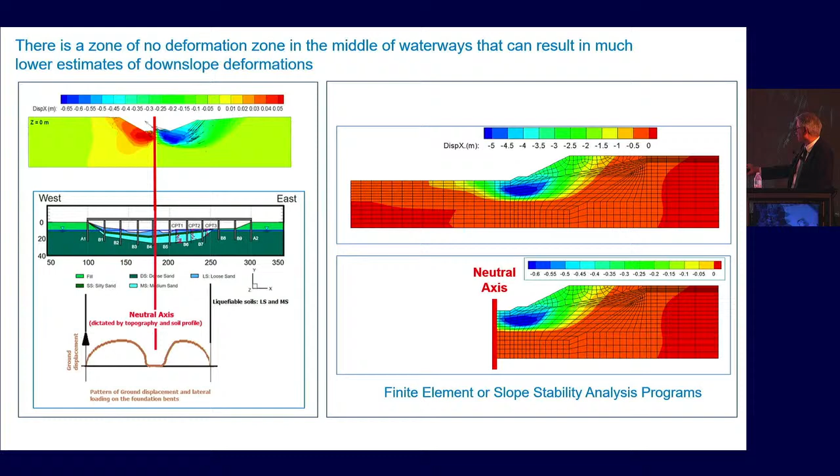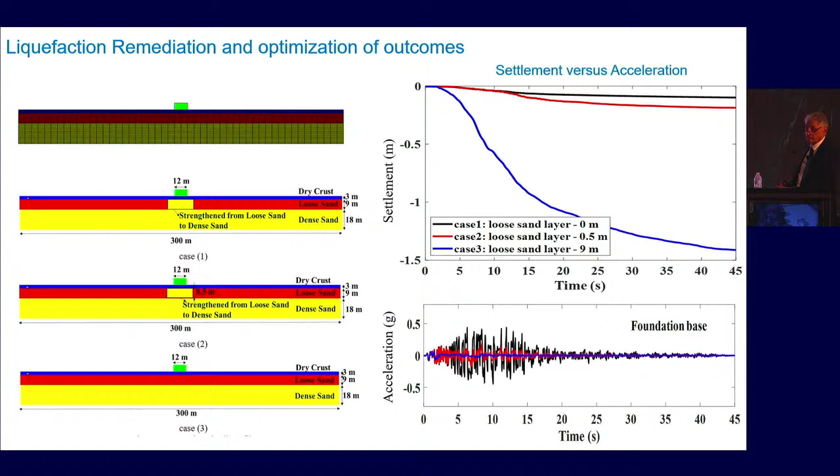But you also get tons of accumulated settlement without ground modification, and you get much less settlement that probably can be tolerated just by leaving this little bit of material under the remediated zone. So if you're still worried, you might buy into the logic of the thickness above the liquefied layer versus the thickness of the liquefied layer.

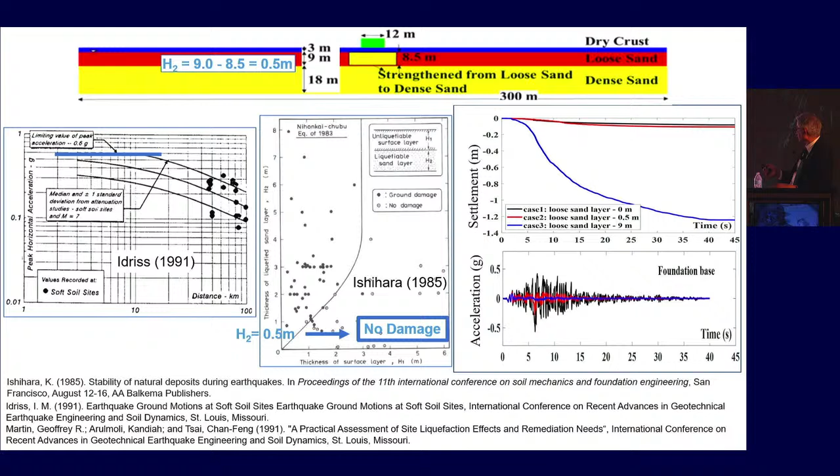This is just another scenario, a different earthquake showing the same exact thing: high accelerations versus low accelerations, and high settlement versus low settlement.

Of course, we all understand that we need also large deformations, which many of us have shied from. We have focused on the plasticity of the soil and so forth. Large deformations still remain a very difficult problem. This is a step in this direction. Many other people are doing even more advanced work than this, but it's something that we want to keep in mind and continue refining.

I wanted also to share with you something that we ended up feeling we had no choice but to do, to get a realistic response once the soil liquefies, especially for the lateral spreading situation.

So let's say you see an experiment and this is the response. This is the yielding before dilation starts. This is the cycle by cycle yielding. And you're trying to get your model to reproduce this response when your effective confinement is essentially 0, and

the shear stresses are super small numbers, under 2 kPa or whatever. And in this location, when we're trying to go from contraction to dilation based on a phase transformation line, it was a joke. We weren't ever getting anything that was reliable, that we could really calibrate in one scenario and then use for another scenario.

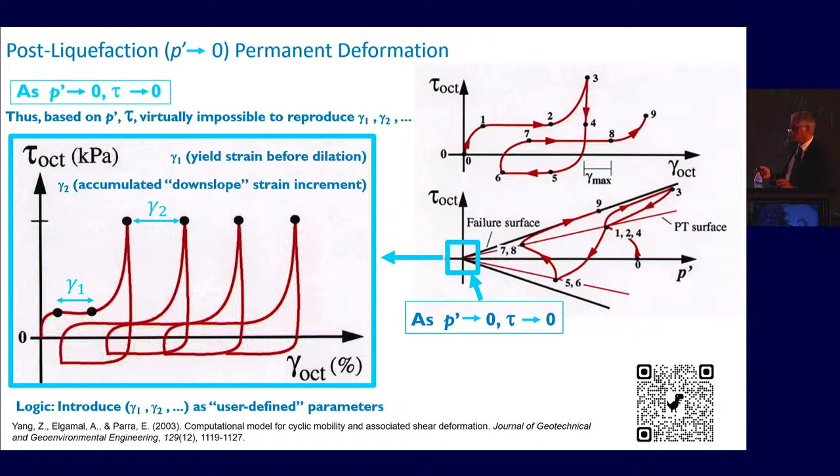That isn't done by too many models. It's a workaround, if you will, but allows you to have a much better opportunity to actually reproduce observation or reproduce a desired outcome that you are looking for. And I'm seeing gradually, especially lately, other ways where one way or the other, people are starting to bring these strain space parameters into their modeling environment.

Okay, so we thought, we won. We are reproducing the strains that we are observing. But actually, when you put this in the computational framework, and now the stiffness is gone, the damping force pops up as a very large element in the overall response and starts getting in the way.

So for example, this is a run here with the classical damping that we were using during the dynamic run. It was working very well, and it didn't show any large deformations after the layer liquefied here between these two zones.

And then we started looking at, well, what do we do? Do we use mass proportional damping? Do we use a combination of mass and stiffness proportional damping to get this flow liquefaction taking place? And eventually, the short answer is, yes, you need a very special treatment of damping once the soil liquefies. The damping that you were using before liquefaction, dynamics and so forth, isn't necessarily going to work once the soil liquefies.

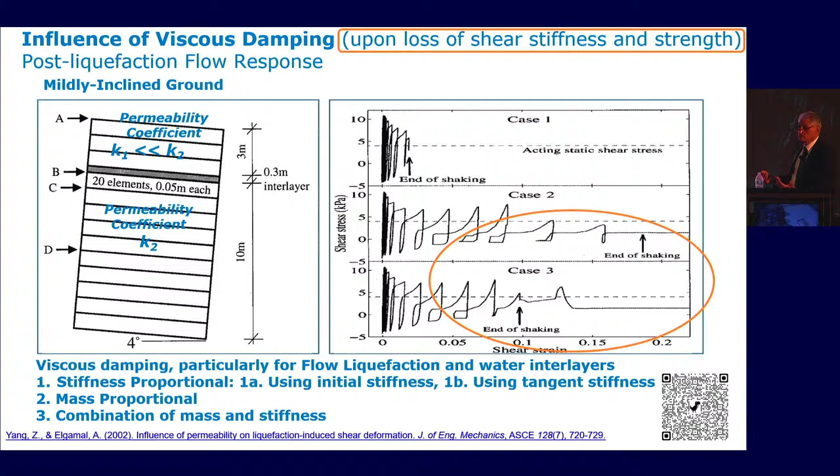Another thing is related to near-field motions. We've becoming more and more interested in assessing damage, when the large one happens in Los Angeles—the large earthquake, the magnitude 8 earthquake, or a higher magnitude earthquake. So near fault, these earthquakes will come with significant permanent displacement.

Our acceleration records today, even the ones that we call near fault, of course, are baseline corrected as usual, and they lose this component of permanent deformation. That still works for many cases, but for cases where the ground is liquefying or you have a very soft layer, the outcomes can be significantly different if you have the permanent deformation versus not having the permanent deformation.

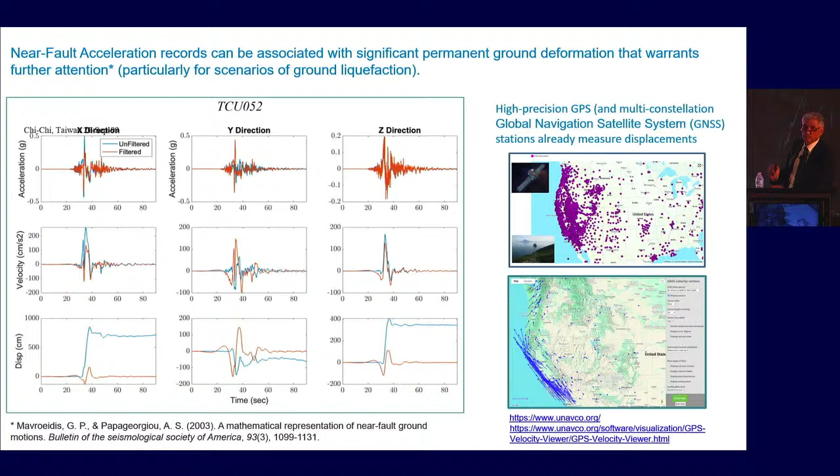Luckily, GPS and satellites are increasingly helping us. And even today, there is enough data that we can go back and make corrections on some of the acceleration records in recent earthquakes that we have recovered, to include that permanent deformation component. But this is only something that will increase with time and will hopefully become part of our mainstream analysis.

Finally, I've been hearing, like all of us, about AI tools. So I went to Gemini, which is the AI tool of Google, and I asked it to compose a song about soil liquefaction.